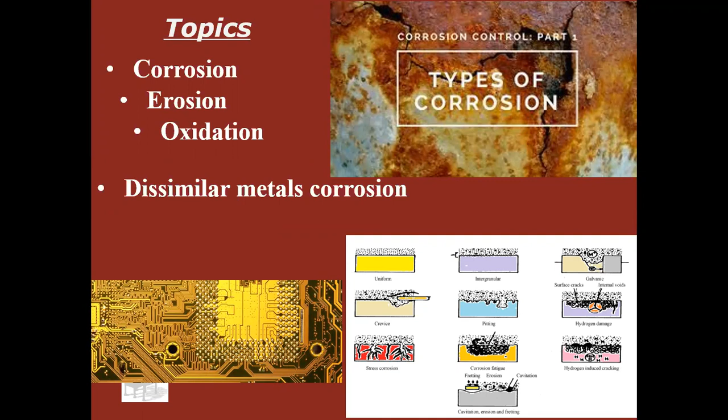Corrosion. All right, we're going to talk about corrosion, erosion, which could really be considered part of corrosion, oxidation, also related dissimilar metals corrosion, and ways to prevent it. How do we stop it?

So what is corrosion? It's a natural process. Notice it converts refined metal into a more chemically stable form. So metals naturally want to corrode. I'm sure a chemist could probably teach this lesson better, but I'm trying to make it easy to understand and show you how I understand it.

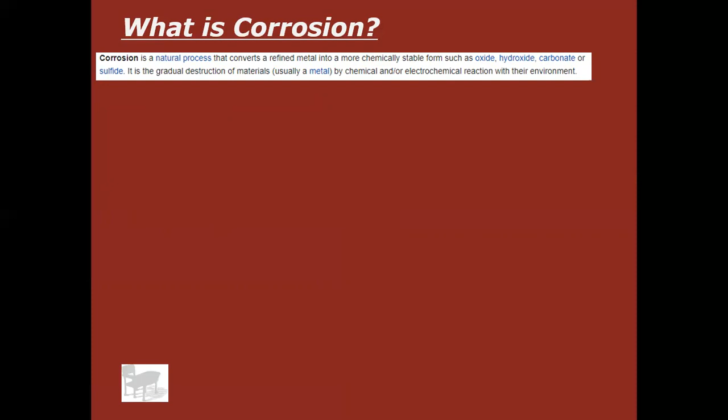Metals naturally want to corrode. We stop them from corroding by artificial means, such as painting them, coating them in oil, that type of thing. But really, if you just leave them in nature, just throw a piece of iron, steel, or aluminum out in nature and let it sit, it will corrode. That's just their natural tendency. It's also considered the gradual destruction of those materials.

People often mistake this as rust. They'll look at a piece of copper pipe that's turned green because of a water leak and say, oh, it's rusty. That's not rust, that is corrosion. Rust only refers to ferrous materials, or materials that have iron in them. So rust is reddish brown.

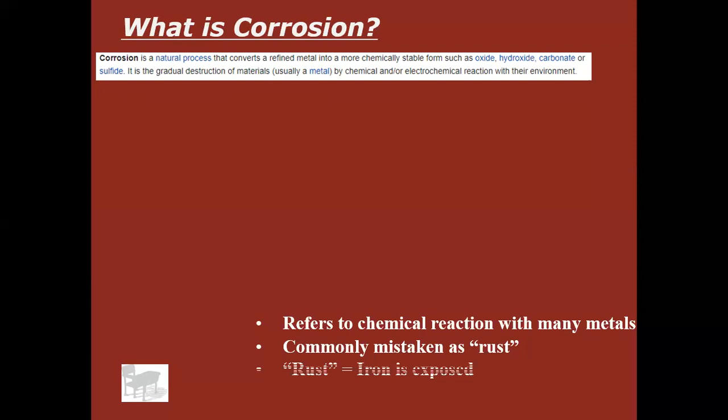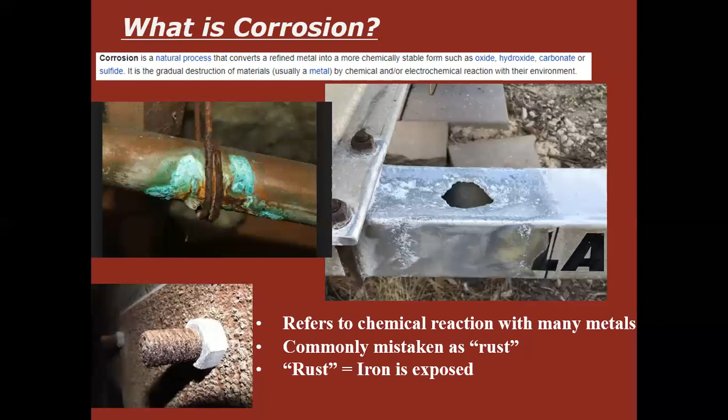So that is not rust, unless you're looking at the wire that supports the pipe. That is not rust, that is aluminum corrosion. That is rust, that is iron oxide that has been corroded. Or I'm sorry, it's iron that's been corroded.

Found this interesting: corrosion of carbon steel, or rust, doesn't occur below freezing. So why, is my question to you? And since you're not here to answer why, the answer is because below freezing, water is not going to be present in the air anymore. So moisture is going to be snow or ice, or there just won't be any in the air, and it falls to the ground. It's not suspended, so it's not touching those materials. That ingredient of moisture is not available anymore to cause corrosion.

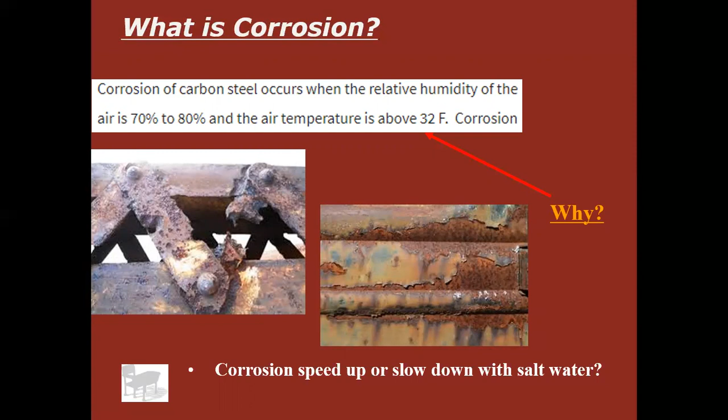I also asked, does it speed up or slow down with salt water? The answer is it speeds up. Salt, and again this gets into too deep a chemistry than I want to get into and that I know, but salt will speed up rust, will speed up corrosion on aluminum, all that type of stuff. All right, go ahead and pause my video and watch this video at this time.

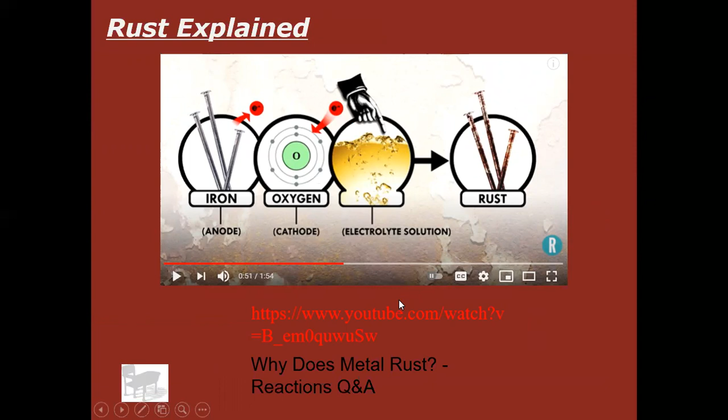All right, so let's talk about erosion. If you think of erosion, you might think of dirt erosion, like a road getting washed away into the ocean or into a big lake. And it's kind of along that same principle.

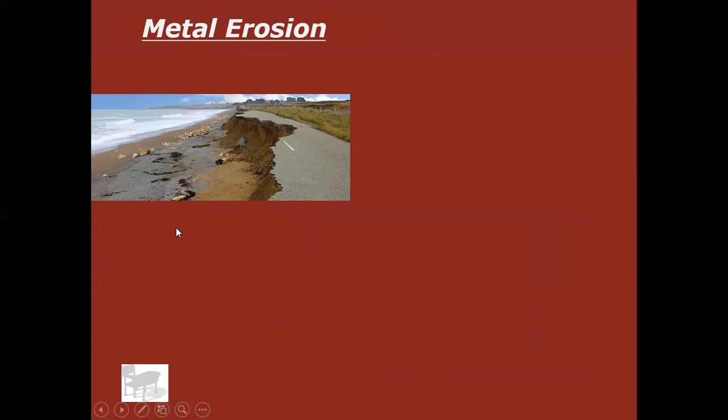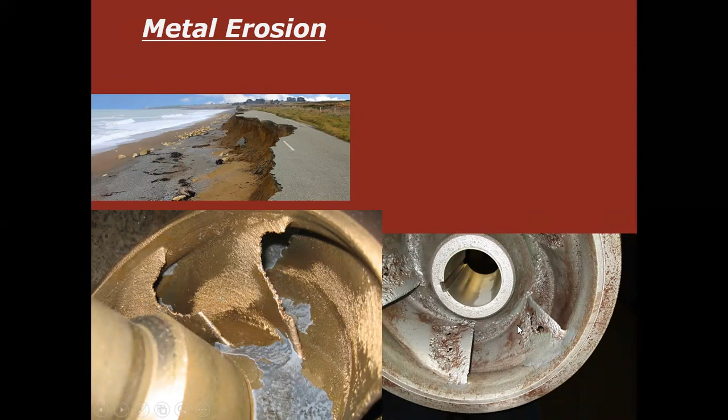So erosion is a degrading of a metal surface, typically caused by some kind of mechanical action. Could be several causes, but the point is it's caused by a fluid or something that's rubbing this, or that's pushing around this. So in this case it was probably just a fluid that has been going past these blades for years, and it aided in kind of a corrosion process, but that's erosion corrosion.

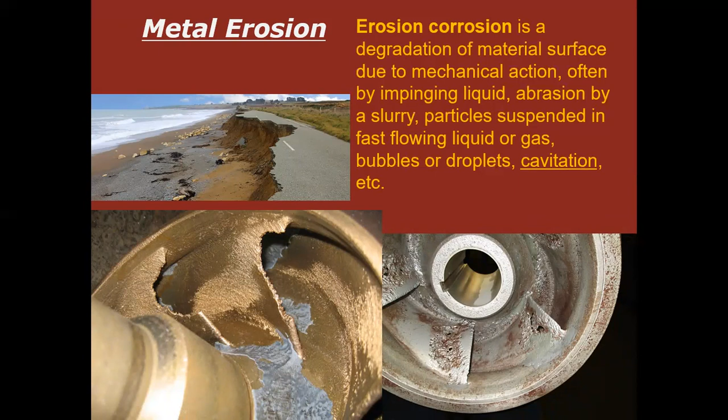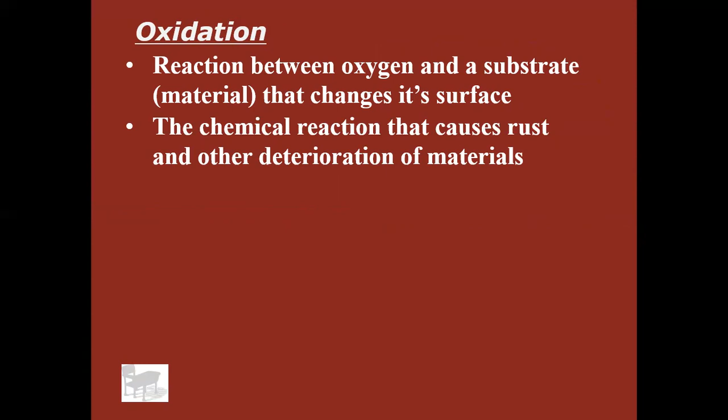All right, oxidation. So it's a reaction between oxygen and a material that will change the surface of the material. This causes rust. This is not the same as rust. But notice I said materials, I didn't say metals, because paint oxidizes. Okay, there's oxidized paint on a truck, oxidized paint on the side of a house.

If you take your hand along an old house, like a house built in maybe the 50s that hasn't been painted since then, it's got the original white or light colored paint on it, or any color I suppose. Run your hand along it, you'll get chalk on your hand. It looks like it's kind of chalking paint. That's paint that's oxidizing. It's degrading just like metal does with time, oxygen, and sunlight.

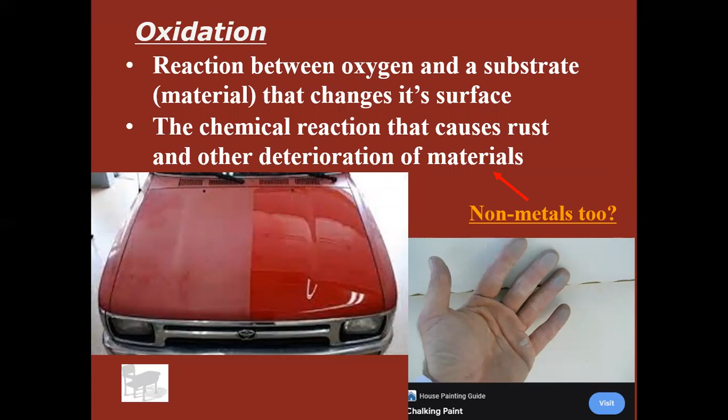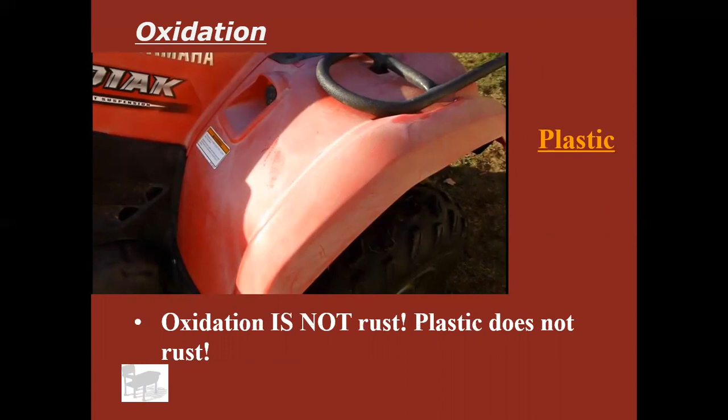Plastic oxidizes. Remember, oxidation doesn't mean rust, because plastic doesn't rust. So that's not rust, that's oxidation. It's degrading of the material with moisture and ultraviolet rays. Doesn't help.

Food oxidizes too. All right, so let's leave oxidation and let's talk about corrosion again.

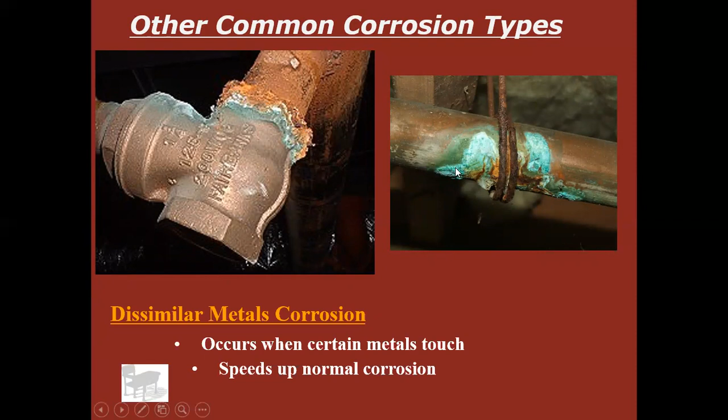Okay, not all metals will do that. If you have gold touching steel, it won't do that. Nickel touching steel, it will not do that. For example, zinc and steel won't do that. So it sort of speeds up what would just be normal corrosion that would take maybe 100 years to eat through this pipe. It might happen in 5 years if it's got dissimilar metals.

So how do we prevent it? We know we've got corrosion, we know how it happens. How do we stop it? Well, the most obvious way is to paint it. Paint the metal and it'll stop corroding.

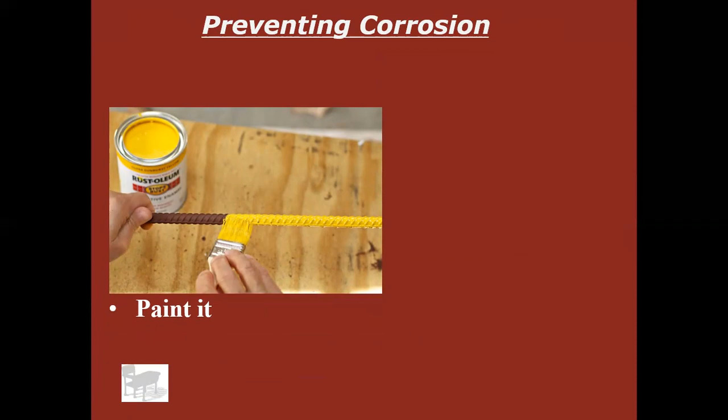Also, you could pour oil on it. And I'm going to ask you now, why does that work? The answer is because oil and paint separate that metal from the oxygen in the atmosphere and the moisture. So they just form a protective barrier. There's nothing magical about the paint or the oil that affects the metal - it just makes that barrier so the oxygen and moisture can't get to the metal to cause a chemical reaction.

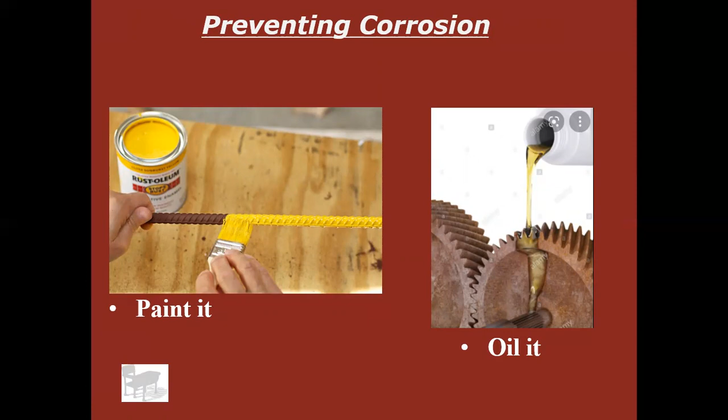There's also something called conversion coatings. An example of this would be Alodine coatings, which is typically only used with aluminum as far as I know. But conversion coatings are not the same as plating - nickel plating and chrome plating are not conversion coatings. A conversion coating, such as Alodine, does not add material to your original part. So if I conversion coat something to prevent corrosion, that part will be exactly the same size down to the thousandth of an inch. If I chrome plate it, I'm actually adding a layer of plating on the outside of this part - it actually becomes slightly bigger. So with plating, you're adding metal or adding something to that part.

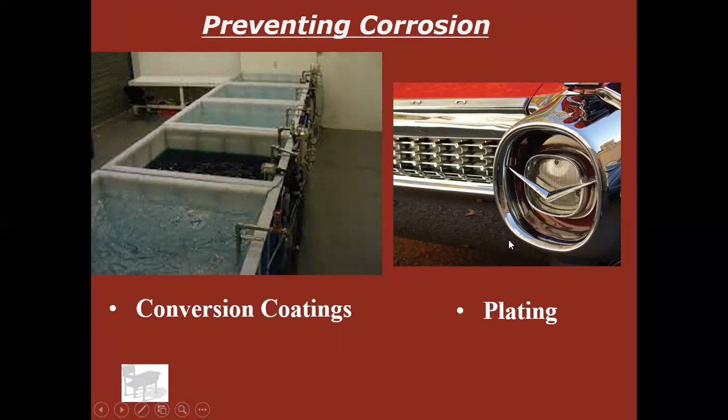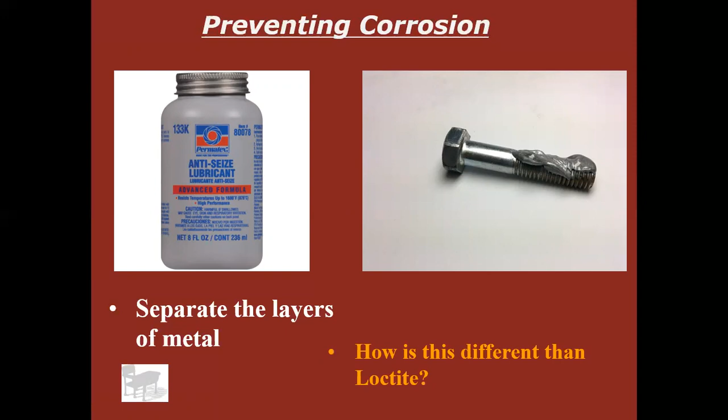Okay, not the same as Loctite - I do want to clear that up. You put this on threads. Loctite is a glue, essentially - just glue that you put on the threads of a bolt to stop it from coming back out again. Anti-seize is something you put on the threads of the bolt to make sure it will come back out again and it won't get rusted in place. So they're sort of opposites in a way, used in opposite manners, but Loctite is just a glue to hold the bolt in so it doesn't get loose.